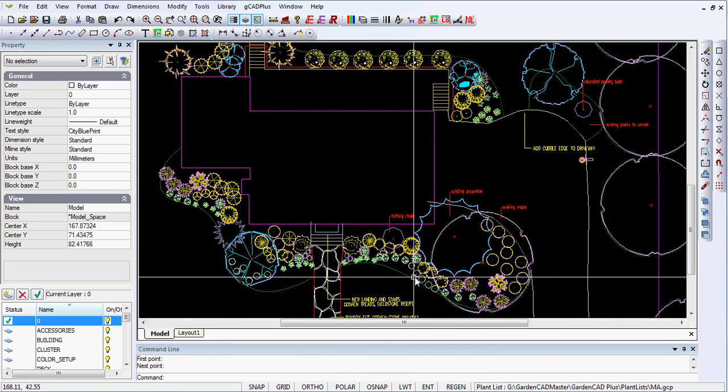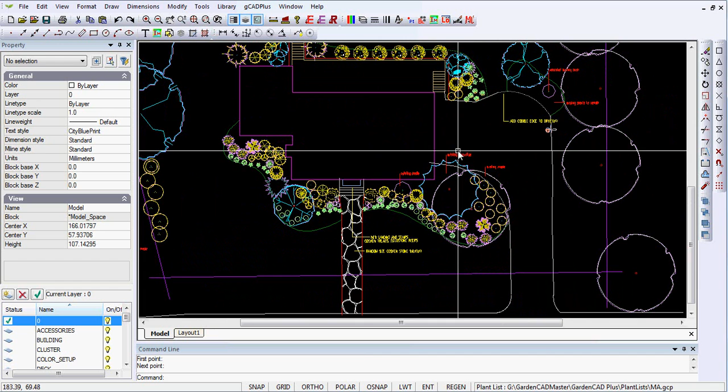What we'd like to do is to create a planting schedule, a list of the species that are going to be used in this design. And you can see that moving around and counting each individual species is quite a tricky exercise. So what we want to do is to associate with this drawing a plant data file.

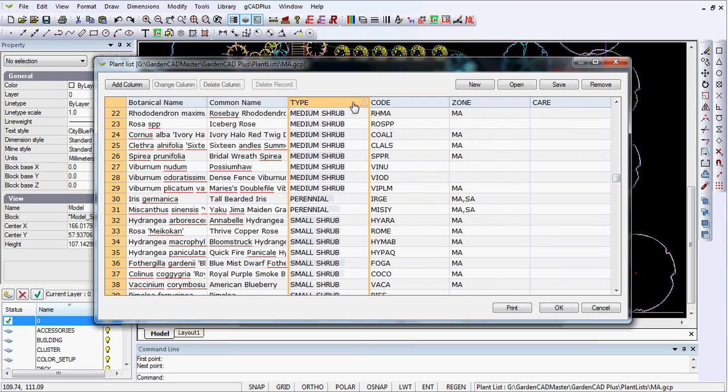So I'll go to gCADPlus and edit a plant list, and you can see I've got a list of plants here that are suitable for that area of the US, and their botanical name, common name, type and code are all there. So if I wanted to put new species in, I could sort, say, the type list, and there's all my medium shrubs grouped together, and I can scroll down and find tall trees and so on.

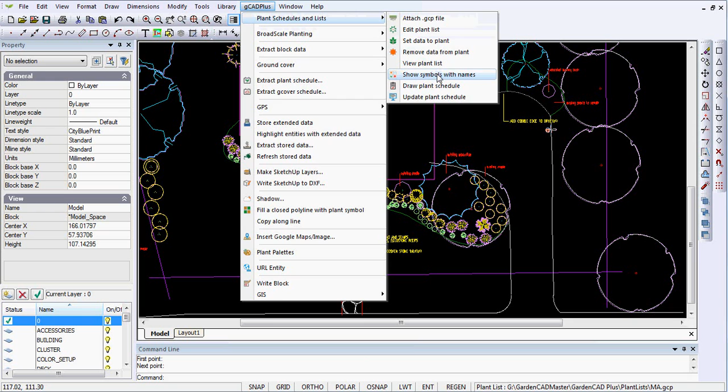I'll cancel from there. I've assigned as many of these symbols as I can to a species in that list, and I have a tool to say show symbols with names. So all of the symbols highlighted here have had a name assigned to them. This is a symbol for an existing species, so it would not be in the planting list.

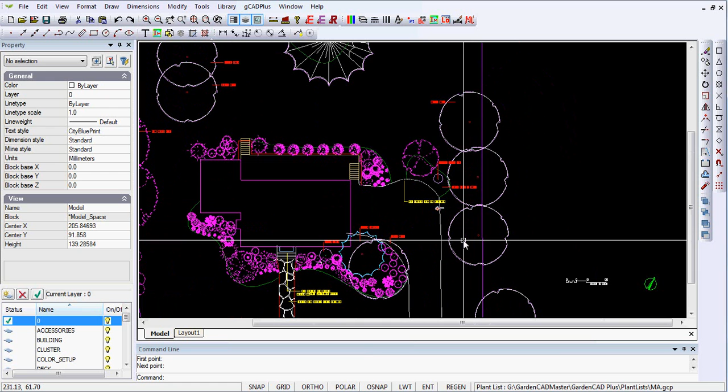And similarly, these taller maples on the right-hand side of the site are also not part of the planting schedule. And now that all species have been assigned, and it's quite an easy job, let's unselect all. To assign a species, it's just a matter of plant schedules, set data to a plant. You pick the symbol, up pops the list, and you just highlight the record, the row. If that was a beech, which it's not, you would just select it.

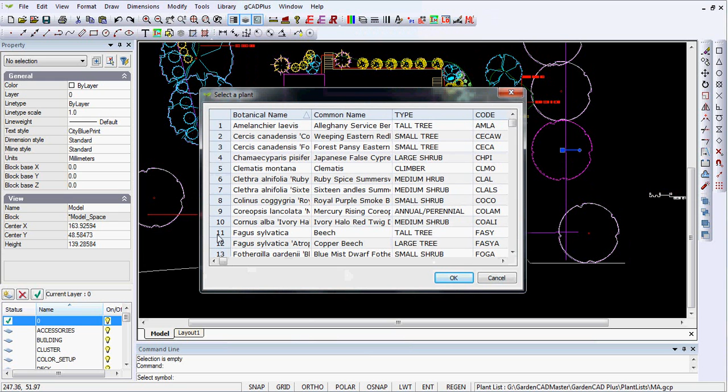So all the plants in this design that we're going to put in as part of the redevelopment are there and have been assigned. To generate the planting schedule itself, it's just a matter of going into gCADPlus over here and draw the plant schedule. And you're asked a couple of questions as that runs. Do you want a column with the record number? I'll say yes for the moment.

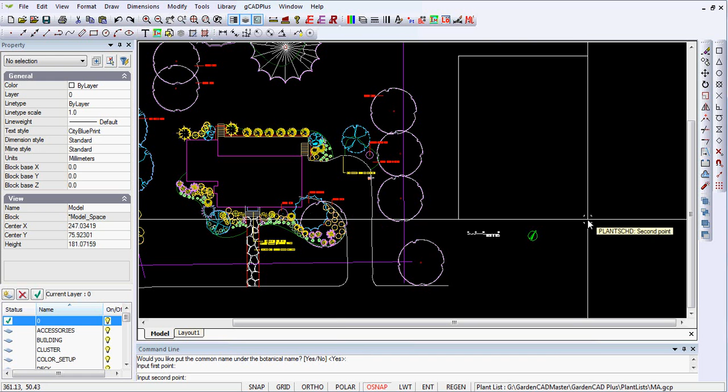And do you want to plot the column, Y for yes? And do you want to put the common name under the botanic name? These are prompts that are appearing in the command area, and I'll say yes to that. In other words, I'm accepting the default settings. And I just click top left and bottom right of the area that I want the plant schedule to appear in.

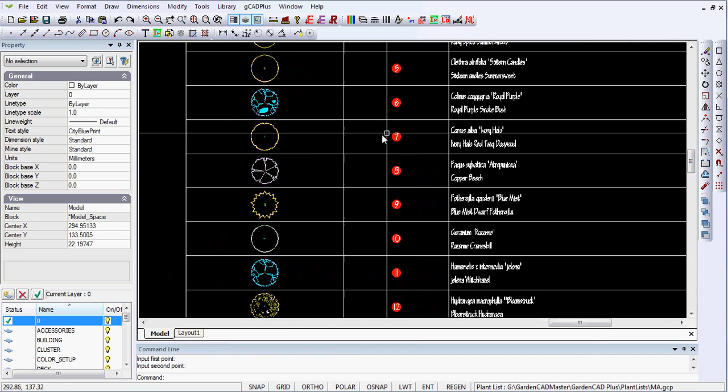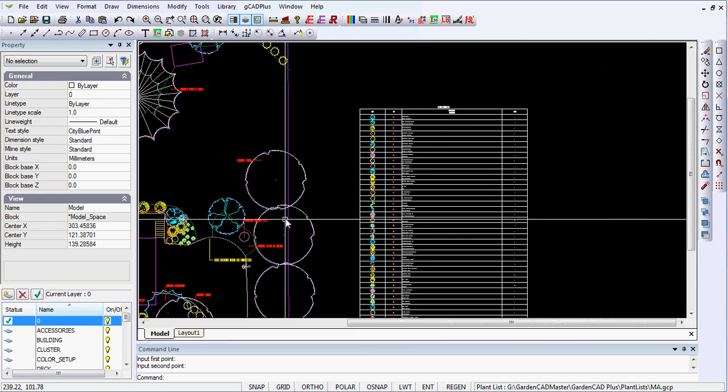And you can see here that in the current text font that I've got set, the name of each particular species and its common name is plotted, and the symbol there. So if we want to find the examples of the royal purple smoke bush, it's been assigned to this particular symbol here, so that's how we can track where that symbol is. There it is there, that's where it's being planted. So the schedule has been done.

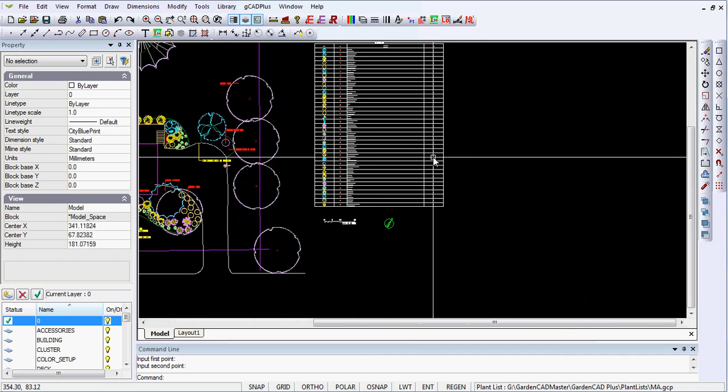If we copy and put extra symbols in, we can just redraw the schedule, and we can redraw the schedule at any time and choose different options. So let's just do that. We'll say draw the plant schedule. We want the red circle number. The reason to have that red circle number is that some people like to put a code, a blob around a group of them in the design. Everyone works differently when they're labeling their species.

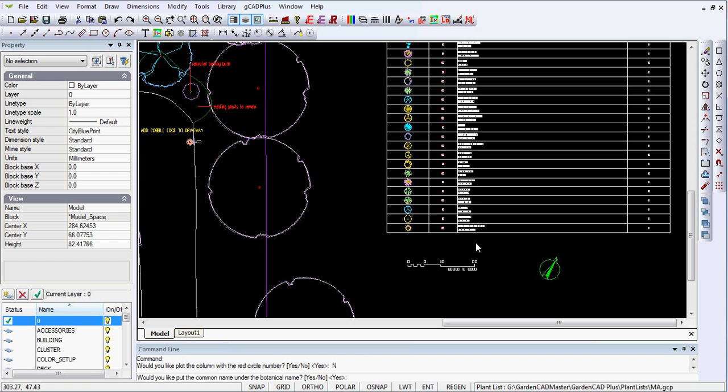So we'll say no for the moment. And you want to put the common name under the botanical name, and I'll say no. So I'm varying my responses here, and we'll draw the schedule somewhere else, and we'll make it not quite as wide, but we'll make it relatively tall, and in goes the schedule. Looks a little better perhaps.

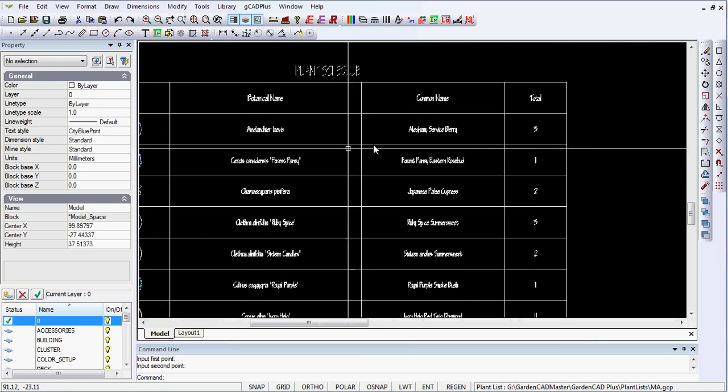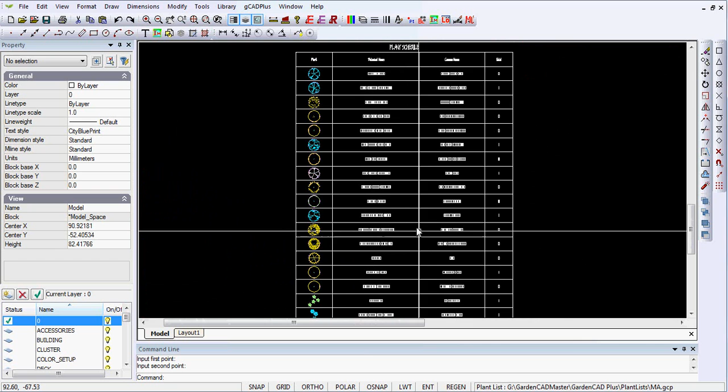There's the botanical name, common name, and the total number of individuals of that particular species in the design are showing. So that's an easy way to draw your plant schedule, and if you do add extra plants, you just update the schedule and the numbers of plants will be incremented. So I hope that gives you some idea of how you might use the plant schedule.

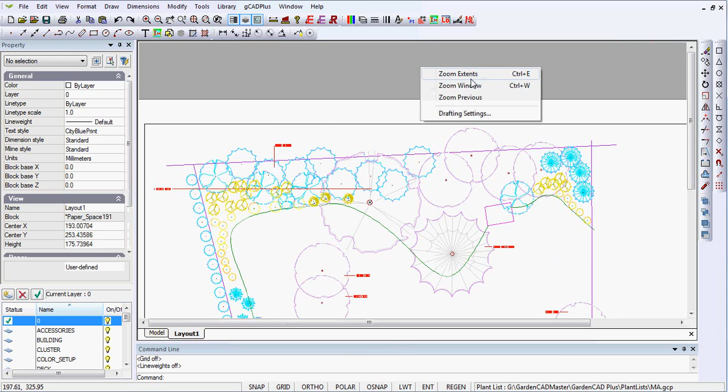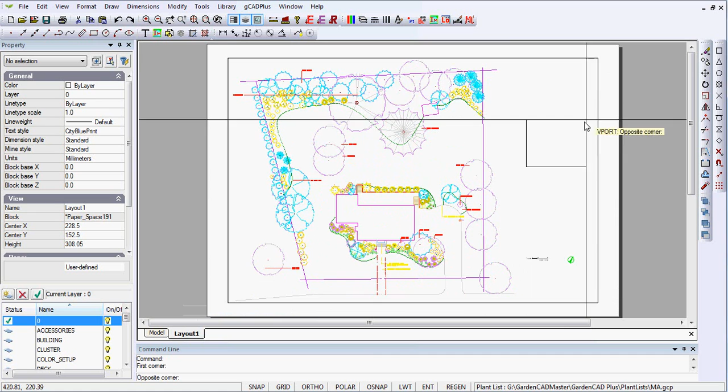I've got a layout here. If I right click and go Zoom Extents, that's an architectural C size sheet, and we could create a new layout and put the schedule there, or we could right click here and create another viewport sitting, if you like, here and on top, and then when we double click in there we can move our box such that it encompasses the schedule and then display it on the layout.

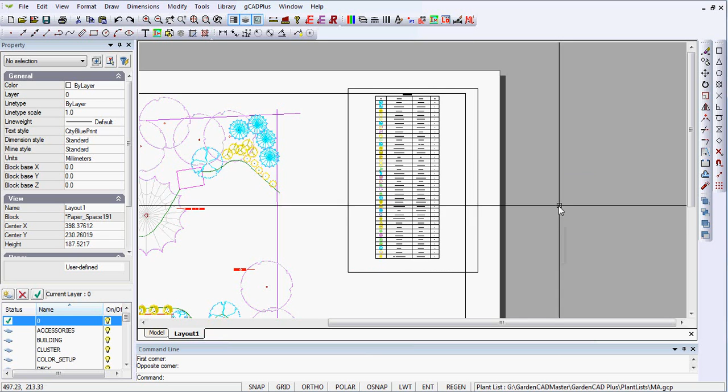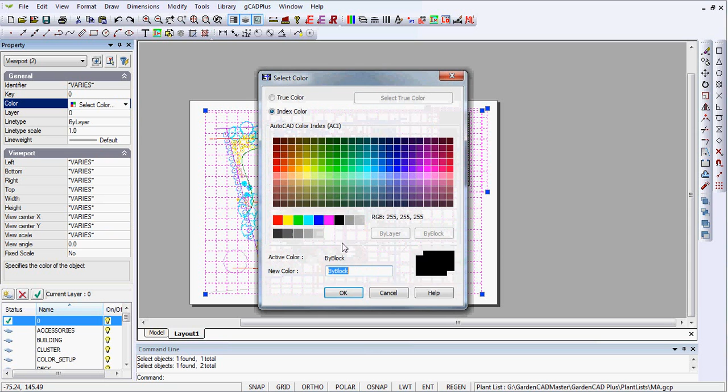We want to deactivate that viewport. Oops, I'm not quite where I want to be. Now we're right. Deactivate the viewport. So now we have the design itself and the plant schedule showing on the one sheet. And to make that look a little better, you pick the two frames there and change the color to something that would not show. We'll make it color 255 and then unselect all.

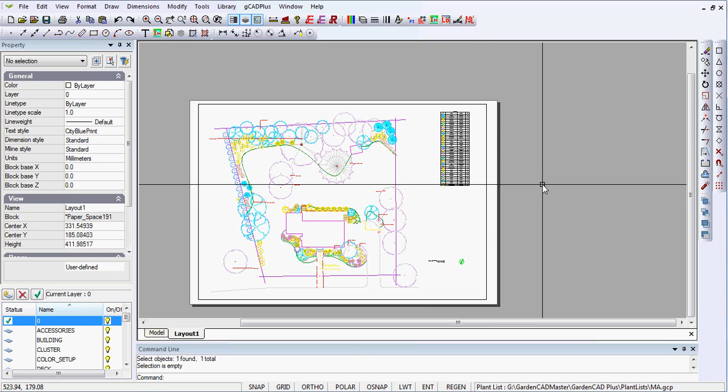And there's our layout. All we now might like to do is to put a rectangle in, like so, and you could take that rectangle and give it a curve at the corners if you want. But can you see that producing the design, the landscape plan itself, and the planting list that goes with it is relatively straightforward. That's not the only way to indicate a particular plant species, and there are other ways that we will show you as we move along.